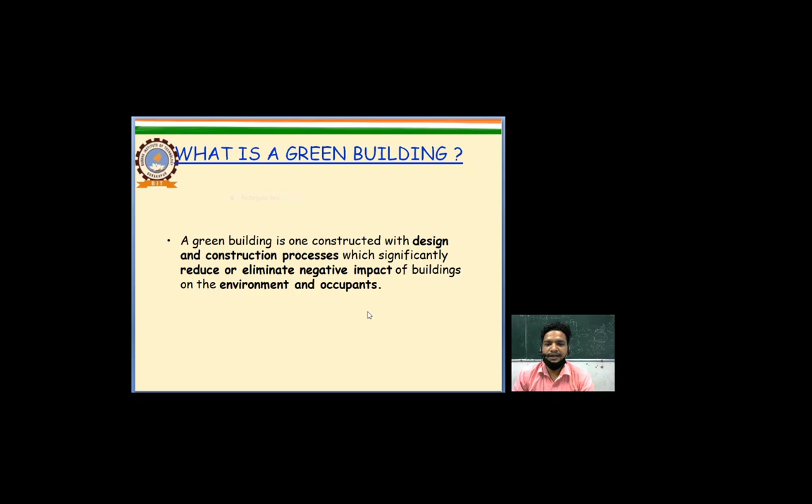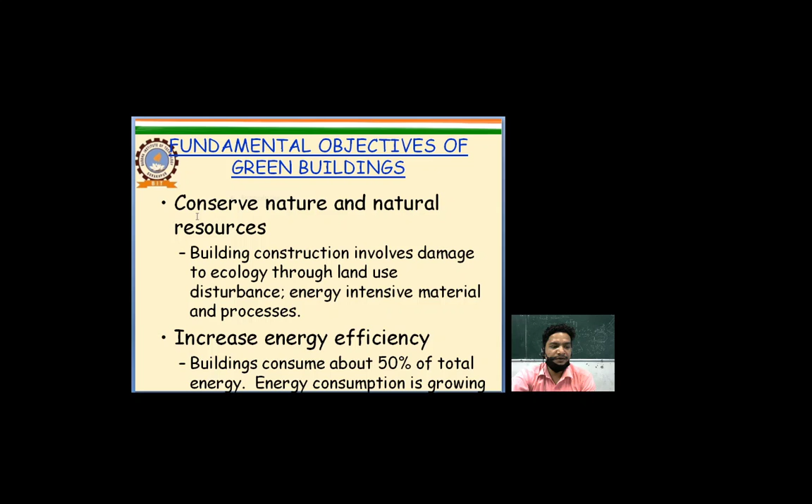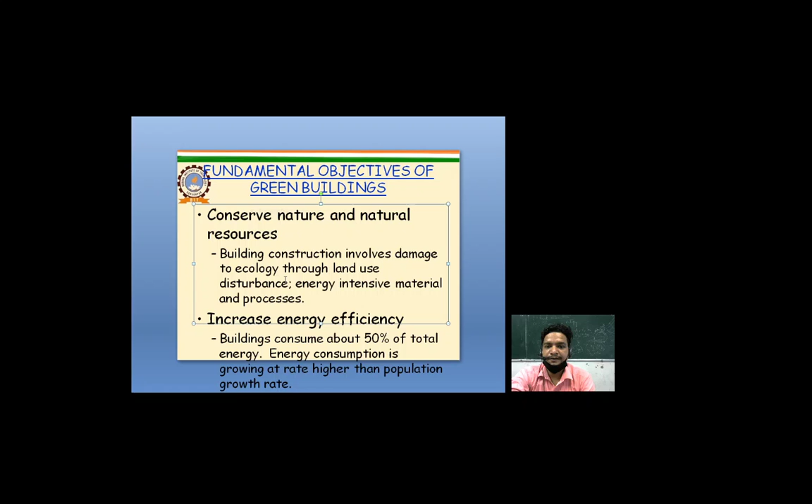The fundamental objective of green buildings: what is the main fundamental objective of green building? The main fundamental objective of green building is to conserve nature and natural resources.

If we talk about conservation of nature and natural resources, definitely fundamentals would come into existence for making green buildings. And if the building construction involves damage to ecology through land use, disturbance, energy intensive materials and processes, this must be addressed.

The second fundamental objective of green building is to increase energy efficiency, because buildings consume about 50% of total energy. Energy consumption is growing at a rate higher than the population growth rate.

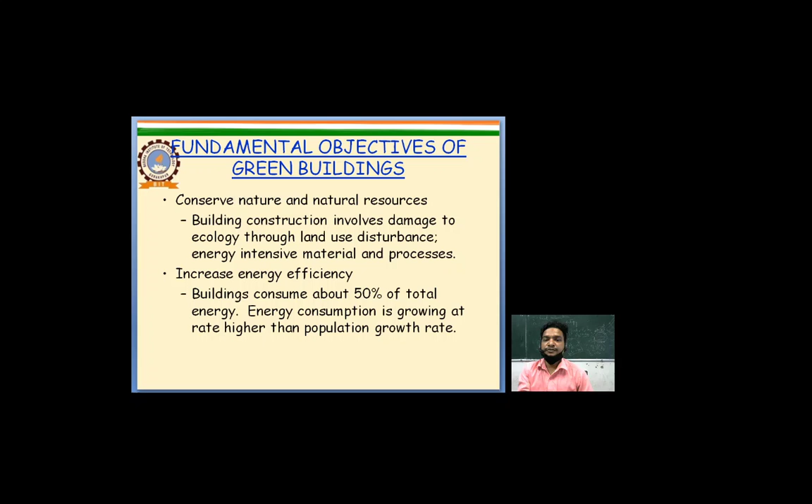If we talk about increment of energy efficiency, that would definitely be a fundamental objective of green buildings. Another fundamental objective of green buildings is to improve indoor air quality.

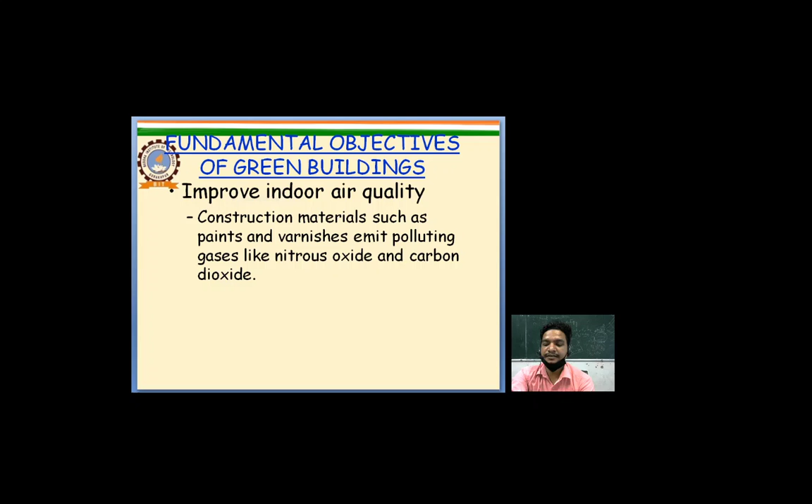If we construct a green building, the materials used, such as paints and varnishes, should not emit polluting gases like nitrous oxide and carbon dioxide.

If we look at the benefits of green buildings: the main benefit is to reduce destruction to ecology. Second is efficient use of resources during construction. Third is reduced construction waste. Next is reduced energy consumption, extensive use of renewable energy, efficient water management, and better indoor air quality through use of non-toxic materials.

If we talk about reduction of destruction of ecology, we get this benefit through green buildings. It also means more efficient use of resources during construction, because these resources are available in nature but we are not using them, and they are very eco-friendly. So it would be very efficient use of resources during construction.

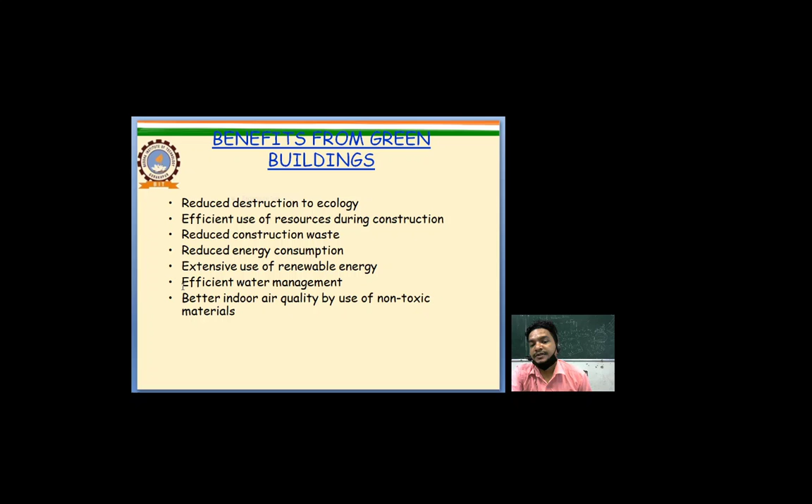Now regarding reduction of construction waste, reduced energy consumption, extensive use of renewable energy, and efficient water management - these benefits would arise with the help of green buildings, fulfilling the concept of efficient water management.

Now, regarding the economics of green buildings: over a 40-year life cycle of a building, the energy cost exceeds construction cost. A green building may cost 10 to 40% more, but the energy cost would go down by 30 to 65%. This range is the maximum in comparison to the green building cost.

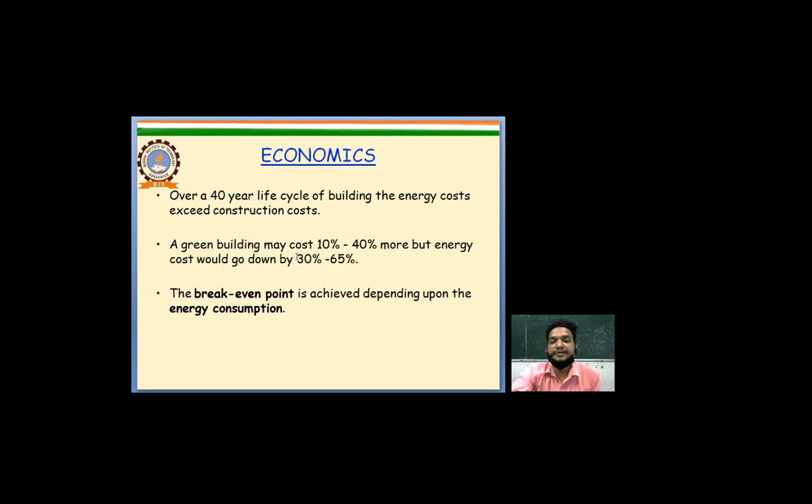The break-even point is achieved depending on energy consumption. If we want to know about strategies for building green buildings, there may be the following types of strategies.

First is to optimize use of nature for lighting and space conditioning. Second is energy efficient light fittings. Another is intelligent features to reduce energy wastage - this is the strategy in which we reduce energy wastage.

The fourth strategy for building green buildings is to use renewable energy resources - those energy resources which can be renewed again and again to fulfill our demands. The next one is bioclimatic architectural principles, a perfect strategy to build a green building.

Reducing material use in construction is also a strategy to establish green buildings, because we gain benefits - if we reduce material use, cost will be reduced and unnecessary costs would not be imposed. The next point is recycling of construction waste.

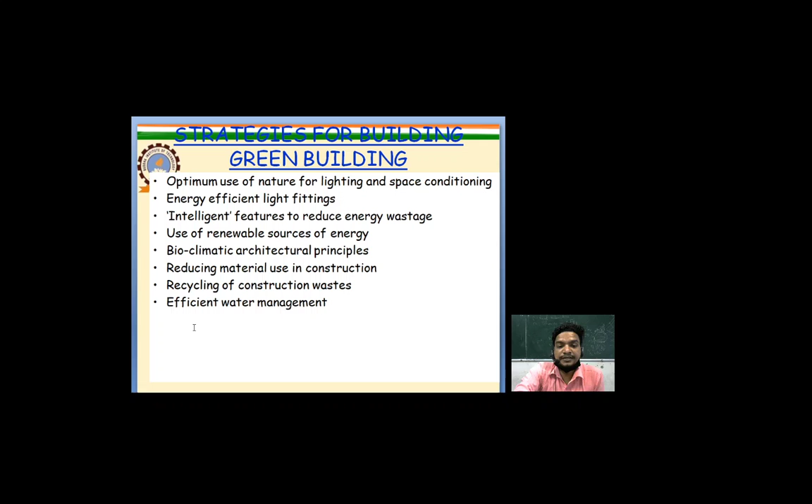Water should not be wasted. If water is wasted, then the strategy for building green buildings would not be achieved. So we will always talk about efficient water management to establish a green building.

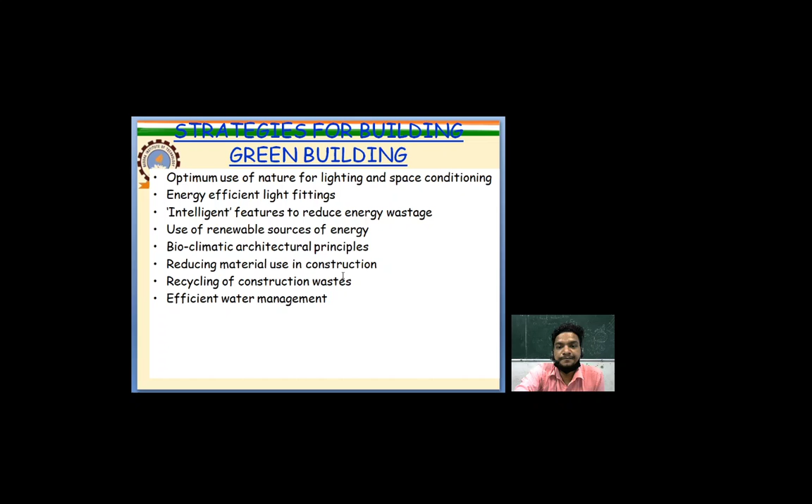Right now we have various types of problems in our life. If we talk about energy resources, there are many types - either we use conventional energy resources or non-conventional energy resources. We are very much aware of how the differentiation of renewable and non-renewable energy resources takes place.

If we talk about non-renewable energy resources, this type of energy is conventional energy resource, and it is in very limited stock, so we cannot use it for a long time. So nowadays we are talking about renewable energy resources - this type of energy can be renewed again and again, and our demand can be fulfilled for a long time.

If we talk about solar energy, solar energy is an energy resource which gives us green energy. Green energy is a renewable energy, as well as a type of energy resource which cannot give any negative impact on the environment.

Right now we have a current slide, and that is denoted to the bioclimatic architectural principles. In this slide we will talk about the bioclimatic architectural principles. This would be subjected to establishing green buildings.

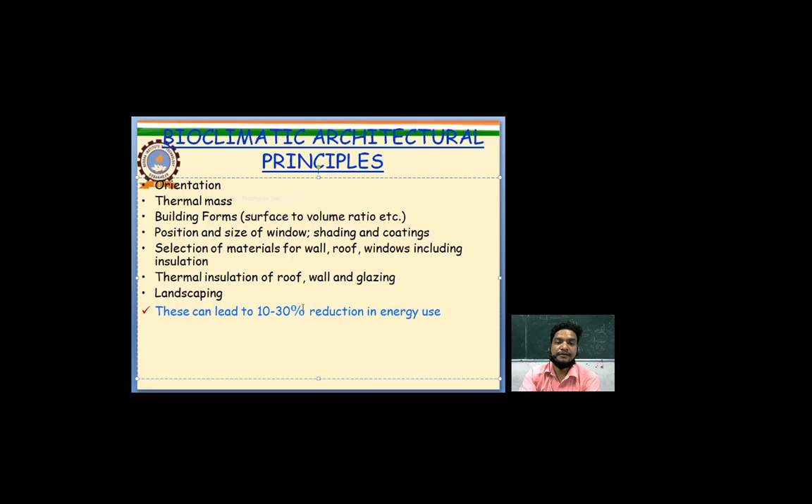If we talk about a solar water heater, with the help of solar energy we can heat the water, and the whole system is known as solar water heater. If we talk about solar power, the power is emitted with the help of the sun, and the solar radiation gives us solar energy.

And if the solar energy falls on the semiconductor, then that possesses some free electrons, and due to the motion of free electrons, electricity is conducted.

Here we can see in this slide solar passive features. If we talk about solar passive features, we will talk about the direct use of solar energy. Here in this slide there are the following types of solar passive features.

First is the earth tunnel. Next is the solar chimney. Then wind tower, cavity wall, courtyard effect, landscaping. These are the solar passive features.

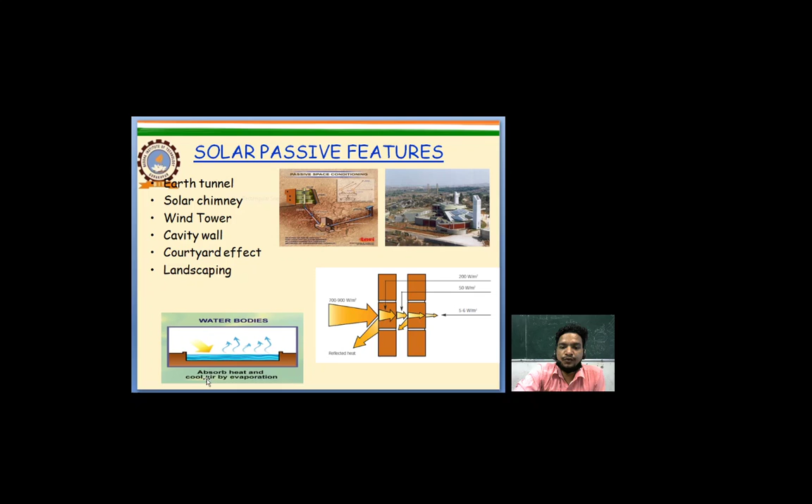In this diagram, you can see over here the absorbed heat and cooled air by the evaporation in the water bodies.

Now if we talk about the rating system, we have the following types. First is BREEAM. BREEAM's full form is Building Research Establishment's Environmental Assessment Method, and it was developed in the United Kingdom in 1990.

Next is LEED, and LEED's full form is Leadership in Energy and Environmental Design, and it was developed and piloted in the US in 1998. LEED India was developed in 2006.

The next rating system is CASBEE. CASBEE's full form is Comprehensive Assessment System for Building Environmental Efficiency. It came into existence in 2001, and it was developed by Japan.

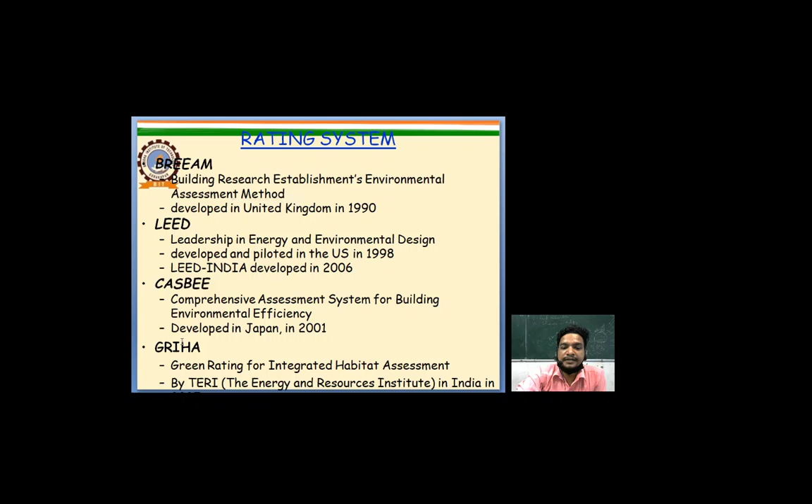Now we will talk about the rating system, and the first rating system is LEED. LEED's full form is Leadership in Energy and Environmental Design. In LEED, there are 5 key areas and 69 points.

Firstly, we will talk about the first key area, that is sustainable site development. It means in the case of LEED, we will talk about sustainable site development. After that, we will talk about water savings - the rating system LEED has the key area of water savings.

And the next ones are energy efficiency, then material selection, then indoor environmental quality. It is rated at certified levels up to platinum level.

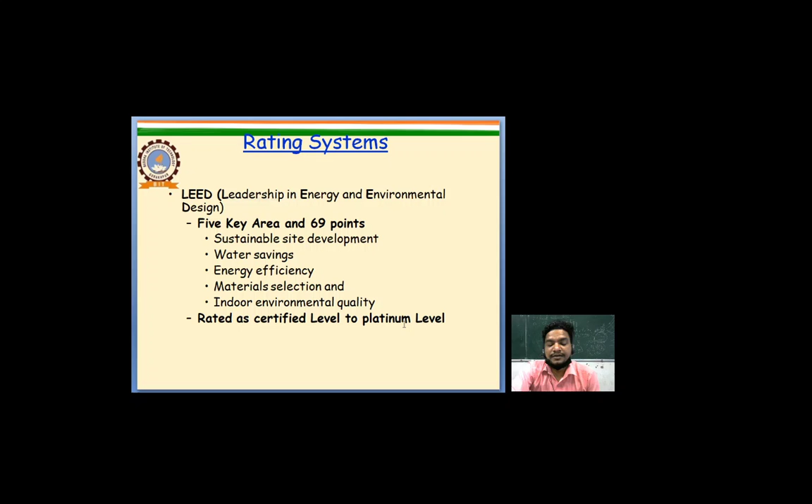You can see over here the LEED rating system. The LEED rating system has this table with three columns. First column is related to the ratings, next column is related to the number of points with a maximum of 69, and then the third column is related to the number of points in 2011, which goes up to 110.

For LEED certified, this range falls between 26 to 32, and in 2011 this value goes to 40 to 49. LEED certified silver level, gold level, platinum level: for silver level, the value in 2011 is 50 to 59, for gold level 60 to 79, and for platinum level it is above 80 in 2011.

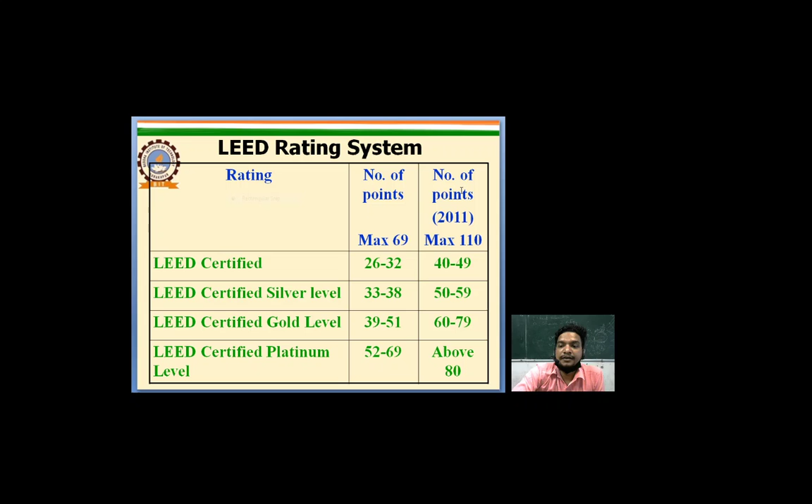Now, if we talk about the green buildings in India, under the certification of IGBC USGBC, there are 2,512 buildings registered, out of which 481 are certified. It means only 481 buildings are certified while 2,512 buildings are registered.

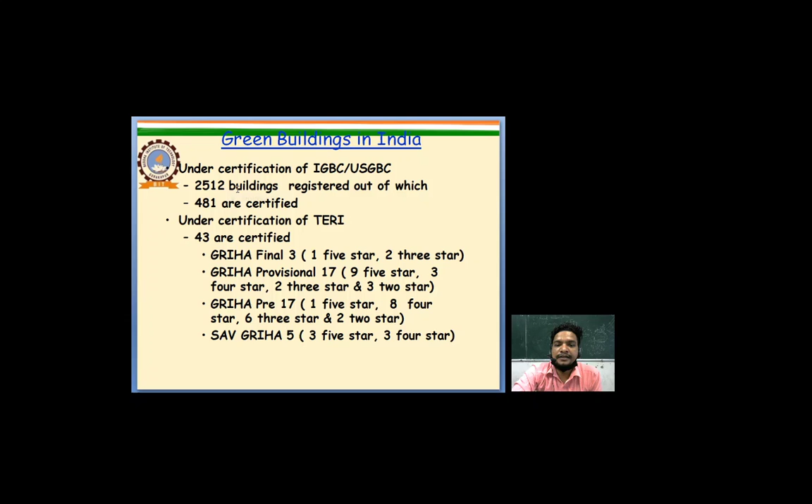Under the certification of TERI, 43 are certified, in which GRIHA final 3, 1 five-star, 2 three-star. Here, all the summary for the TERI rating system in India is given.

Now, if we talk about the benefits of green buildings, there may be the following benefits. First one is the tangible benefits. In tangible benefits, the form of benefit is a 20 to 30% reduction in energy consumption.

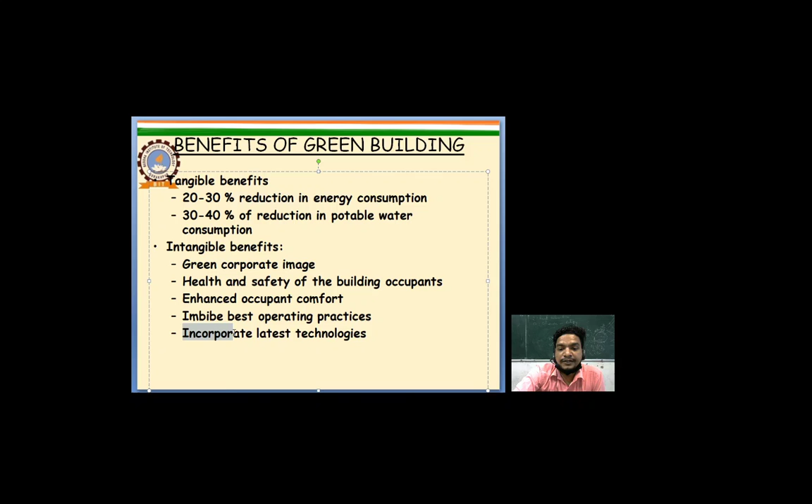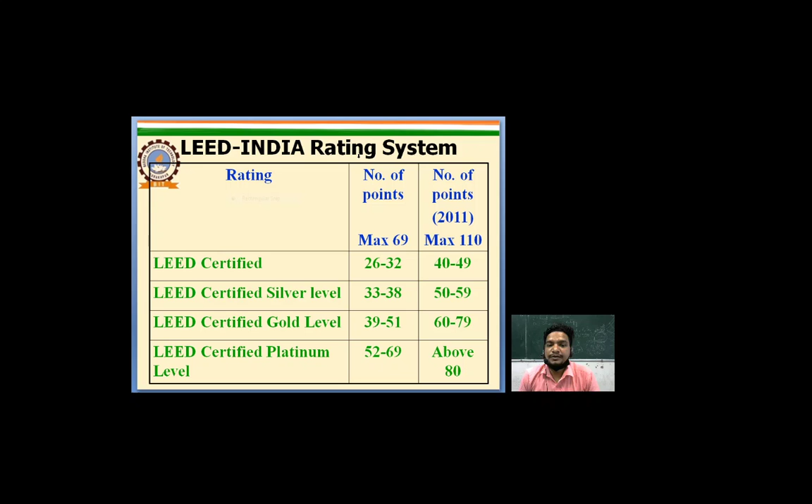Yeah, in the LEED India rating system there are three columns. First is rating, then number of points up to 69, and number of points according to 2011. I think these slides have been discussed.

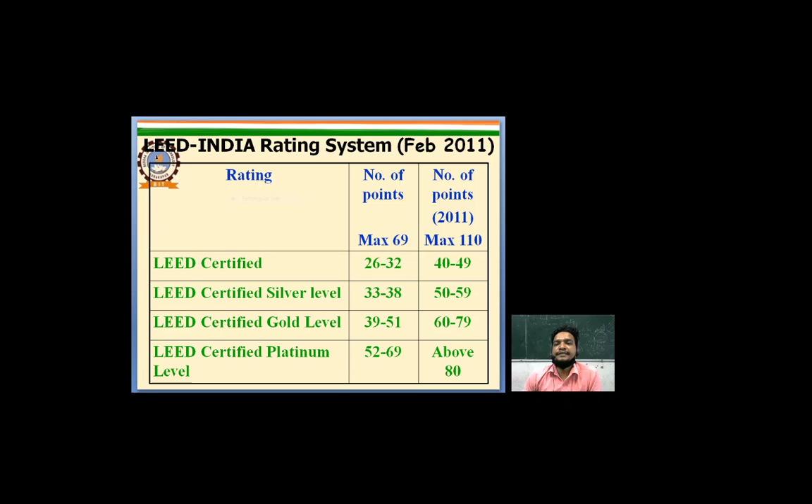Now, here the prerequisites: first one is the site selection and planning.

Site selection and planning. In site selection and planning, the requisites are related to the construction activity, pollution control, then water efficiency, water use reduction. These are the prerequisites.

Before you find the details of green buildings, you must be aware of the prerequisites. The first prerequisite is site selection and planning. The location is what would be subjected to the existence of the green building. After site selection, a plan base would be there, so we have to plan about that.

So construction activity, pollution control, definitely will be there, and water efficiency. If we talk about water efficiency and the prerequisites, then we have to reduce the water use.

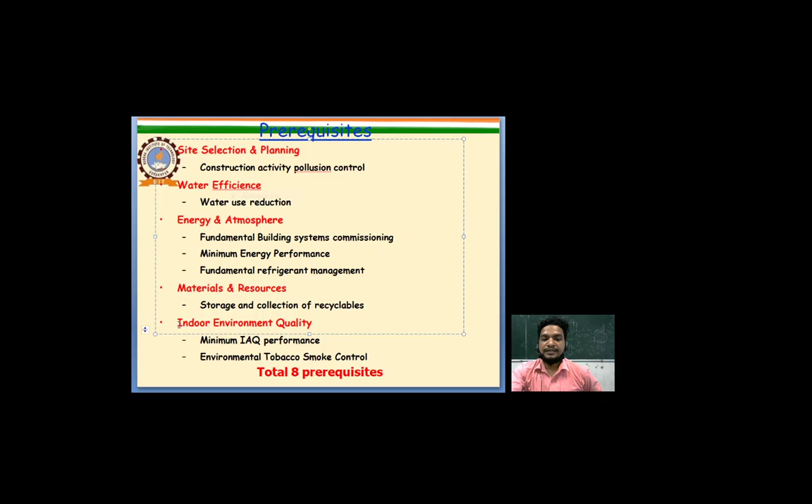Storage and collection of recyclables. We have to be aware of the type of resources which can be recycled, and take it seriously for the main purpose, that is to make green buildings. And next one is indoor environment quality.

Now, first one is sustainable site. Sustainable site is the site selection point one: high value form land, high hydrogeological risk, habitat for any species listed as threatened or endangered, high ecological value, public.

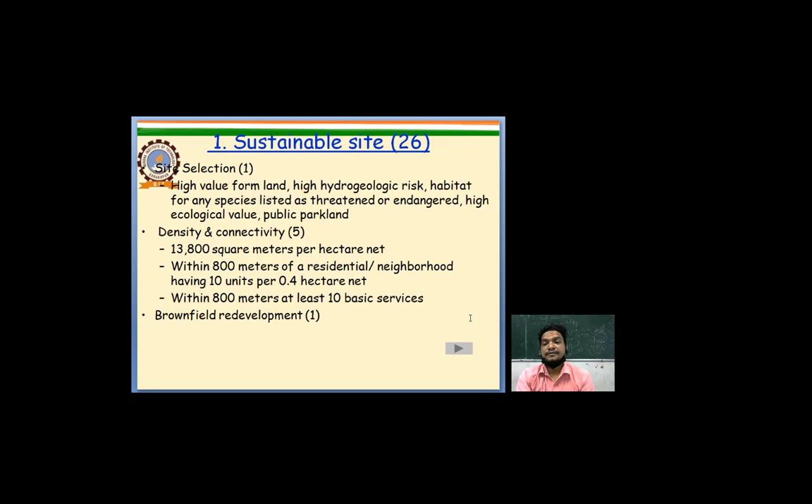Sustainable sites having some points, such as site selection, and another one is density as well as connectivity. Example of numeric values over here.

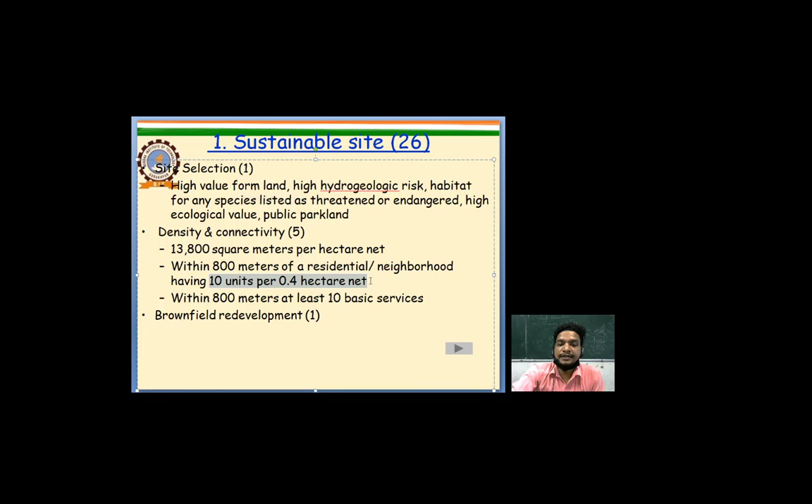13,800 square meters area is given, and this is within 800 meters of residential area, and it having 10 units per 0.4 hectare net. Within 800 meters, at least 10 basic services.

Now, for sustainable site, alternative transportation is 12 points: public transportation access is 6, bicycle storage and changing rooms is 1, low emitting and fuel efficient vehicle is 3, and preferred parking capacity is 2.

Site development has a numerical value of 2. What is the main motive of site development? It is to protect or restore habitat as well as to maximize the open space.

Next one is stormwater design, having the number 2 points. First is quality control. If we talk about quality control, we will talk about the evolution of quality control. Many years ago, the stone age was there, and during that time, stone-made tools were used.

But as technologies increased, due to that increment, the tools standard got changed, and due to that change, evolution takes place. Right now we are talking about innovations, and this is above the technology.

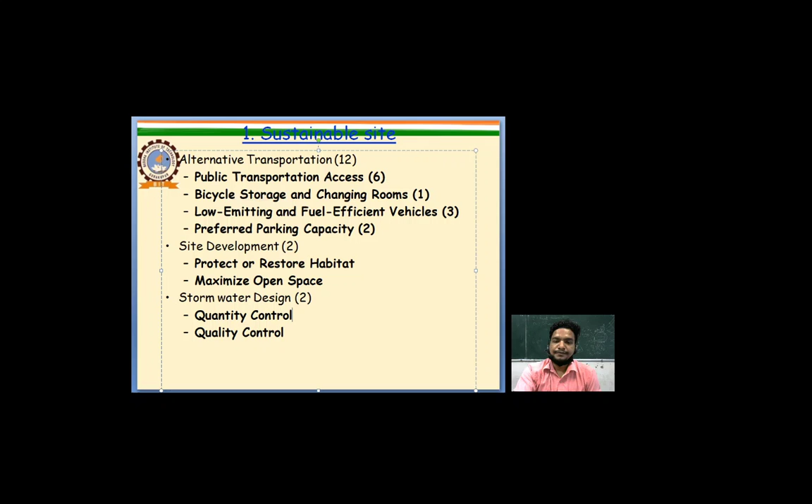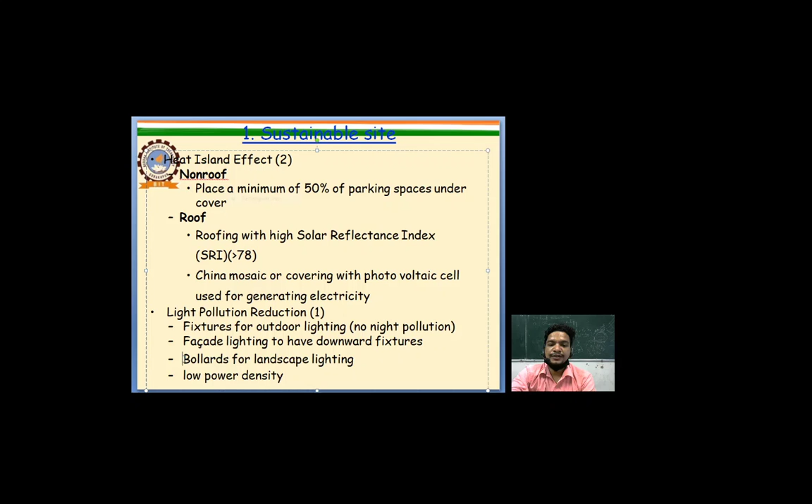Next one is light pollution reduction. This includes fixtures for outdoor lighting with no light pollution, facade lighting to have downward fixtures, bollards for landscape lighting, and low power density.

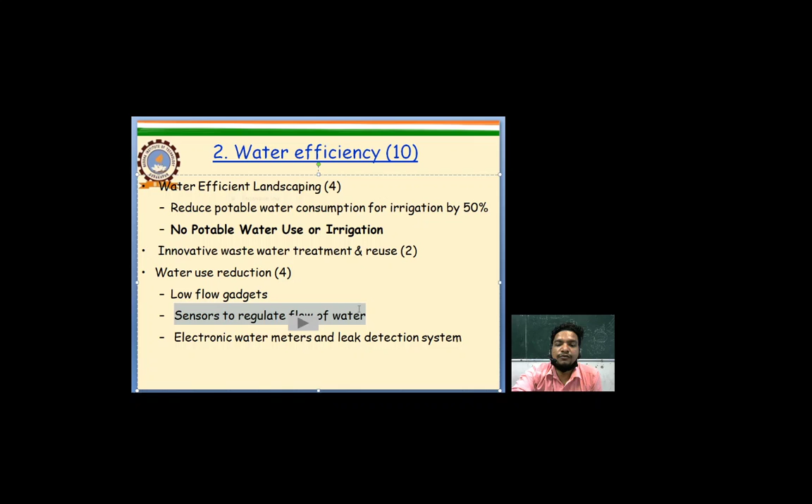Next point for water efficiency is innovative wastewater treatment and reuse. If we use innovative wastewater treatment, we can reuse that, and water will not be wasted. Water use reduction includes low flow gadgets, sensors to regulate flow of water, as well as electronic water meters or leak detection.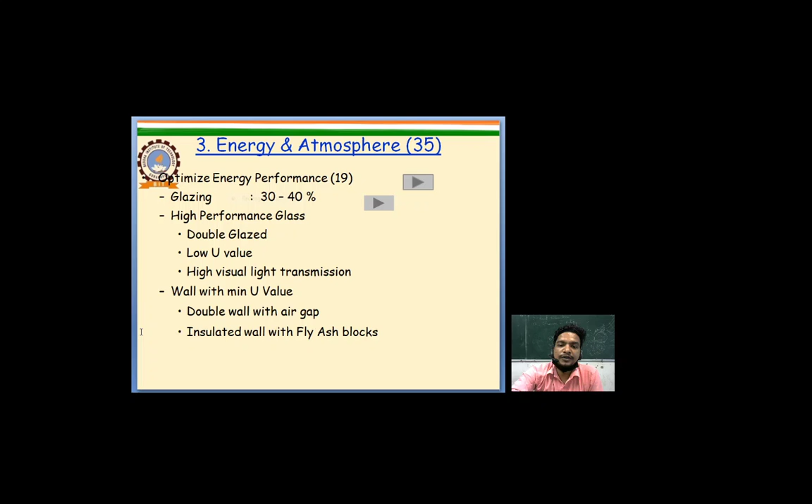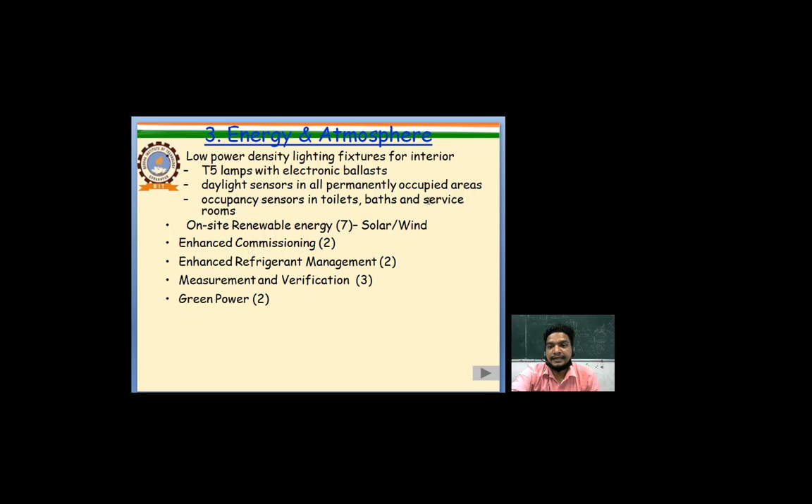Enhanced commissioning, enhanced refrigerant management, measurement, verification, green power. These points are for energy as well as atmosphere to build green buildings.

Now materials: 4 points are given for building reuse, 2 points for construction waste management, 2 points for material reuse, 2 points for recycled content like fly ash in concrete, plaster, bricks, etc. Regional materials get 2 points.

Use of carpet, etc. Use of recycled and refurbished material. Rapidly renewable products, 1 point for there. Certified wood. This should be in the form of material to build green buildings.

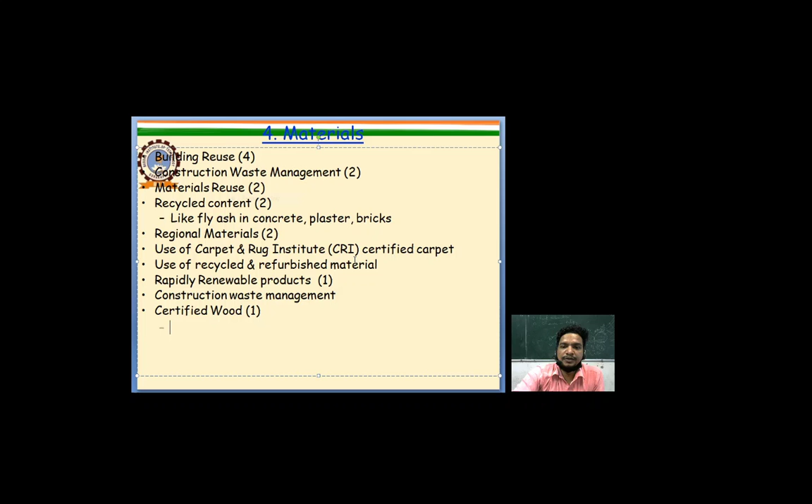Third point for the new building: outdoor air 30% more than ASHRAE, American society, and separate room for heavy duty copying machine chemical mixture. Flush out building before occupancy, and carbon dioxide monitoring system should be there.

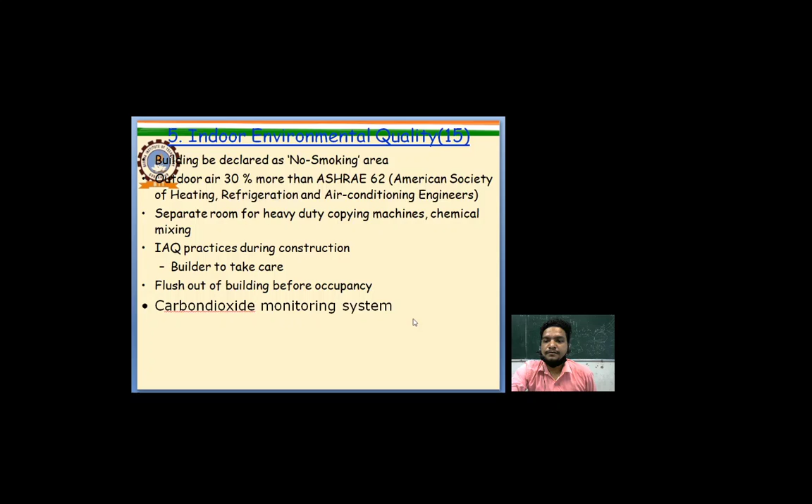Now the next is indoor environmental quality. First one is the controllability of system. If we will talk about indoor environmental quality again, then we will talk about the controllability of system.

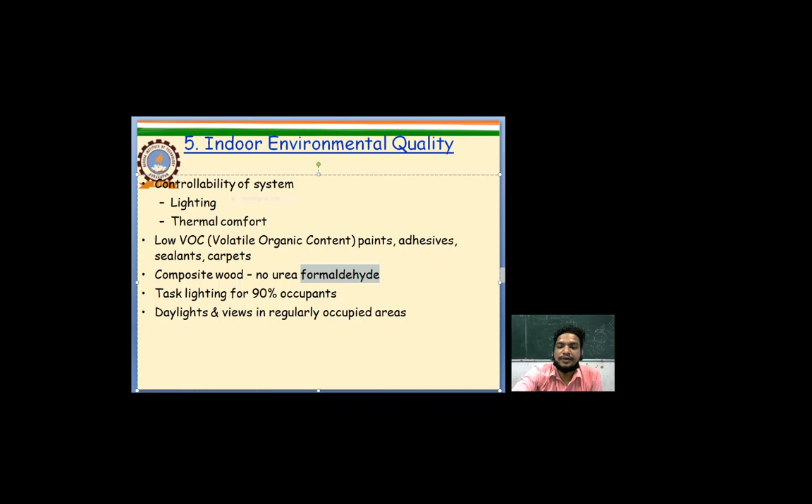Now the next one is innovation and design. Exemplary water efficiency, reduction in potable water use - you have to increase this reduction more than 40%. That is innovation and design.

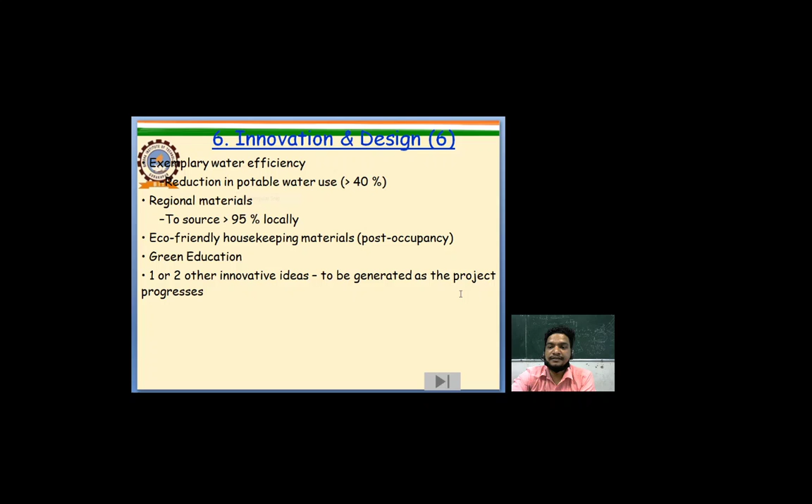Regional materials to source should be greater than 95% locally, and it should be eco-friendly housekeeping materials post occupancy. Should be green education, one or two other innovative ideas to be generated as the project progresses.

Regional priority: first one is water efficient landscaping, then innovative wastewater treatment and reuse, then water use reduction, then optimize energy performance, after that enhanced commissioning, and after enhanced commissioning, measurement and verification. These are the regional priorities.

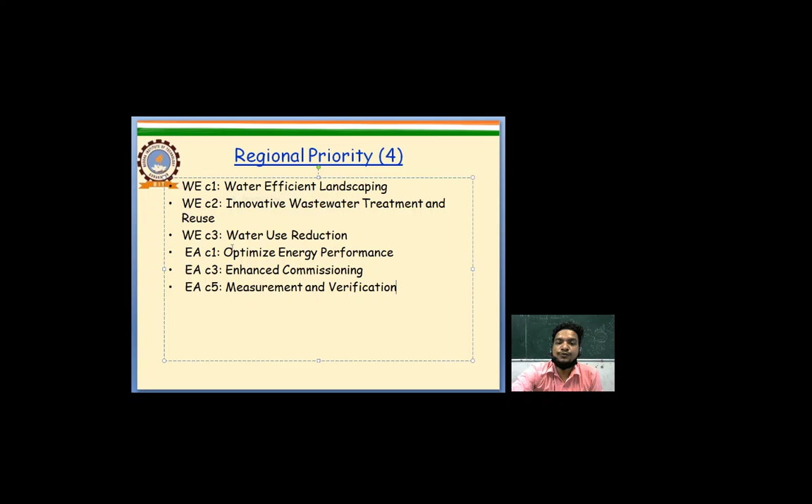First one is water efficient landscaping, then innovative wastewater treatment and reuse, water use reduction. These are the regional priorities.

Now we will talk about the approach for green buildings. Firstly, there should be teamwork. Without teamwork, nothing is possible. So for green buildings, there should be teamwork. And the teamwork would be among which persons? Would be the contractors, would be the consultants, and after combining their effort, a teamwork would come into existence.

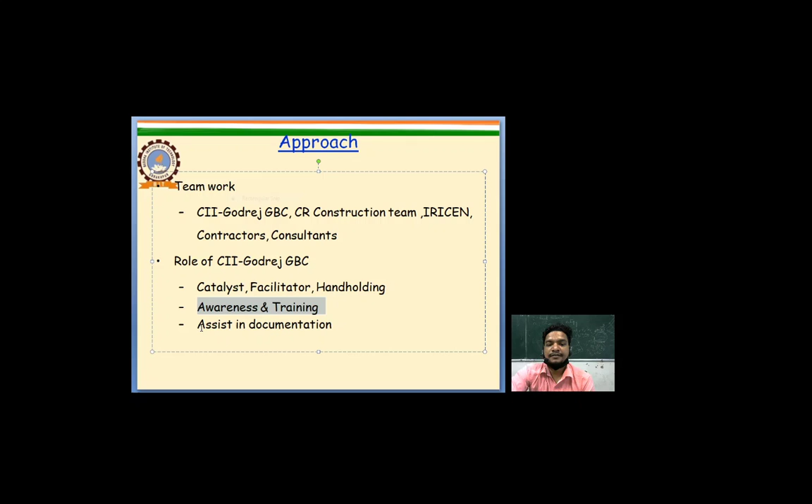Next one is the role of CII Godrej GBC. It is the catalyst, facilitator, hand-holding, awareness and training, assist in documentation. What next?

Register project with IGBC, Indian Green Building Council. Appoint consultant for facilitation, energy simulation, as well as fundamental commissioning agent.

Energy simulation is very important. Then implementation of improvements, then documentation by consultant architects team CII, then this will be reviewed by IGBC, then LEED India certification would be there. So these steps are those steps which will come before the LEED India certification.

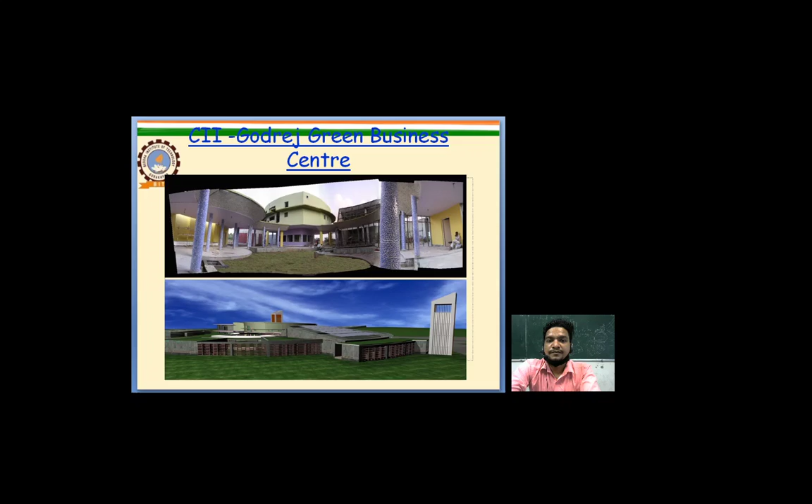90% of the building has adequate natural lights. So that's why 90% of building has adequate natural lights.

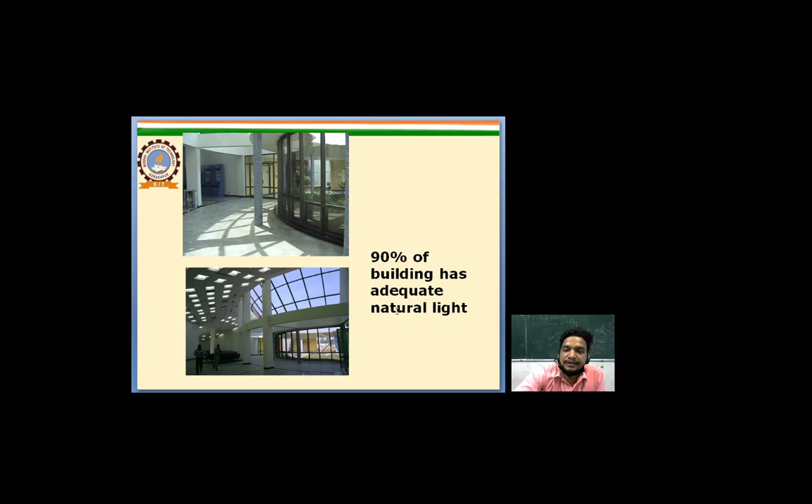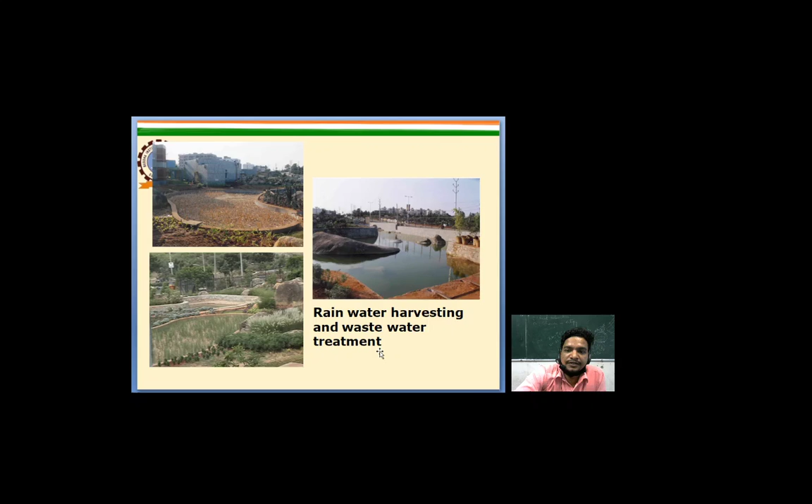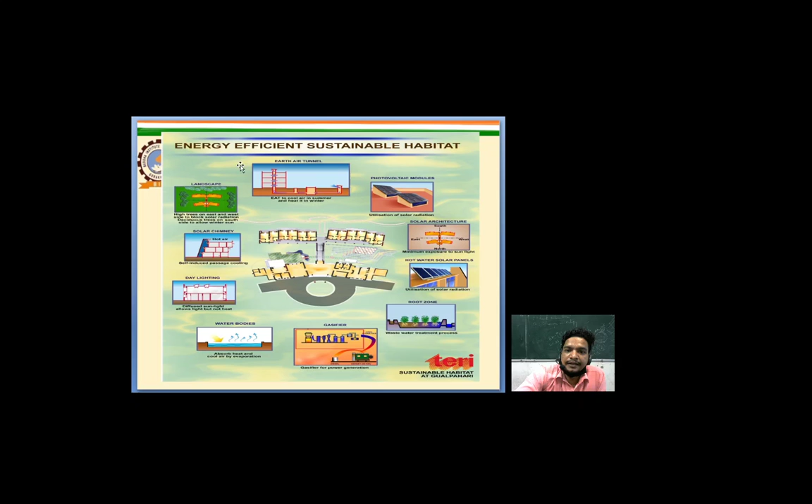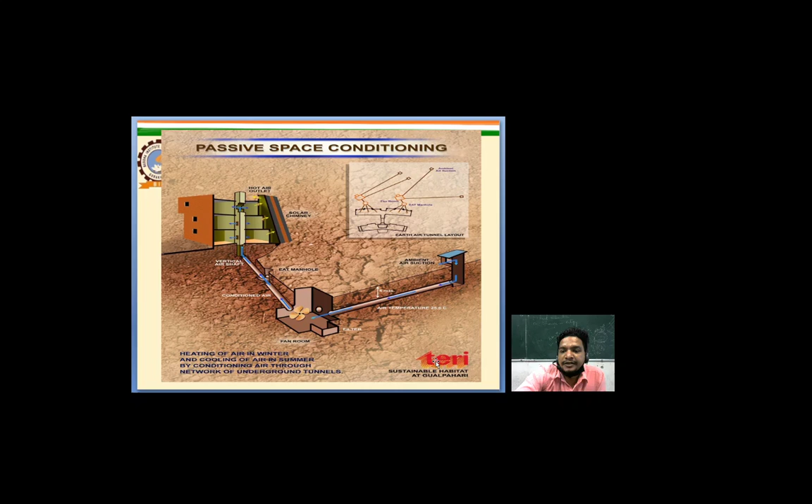TERI retreat is over here. This is the energy efficient sustainable habitat over here. Passive space conditioning is over here, and that comes under the category TERI sustainable habitat.

This whole diagram is related to renewable energy. And in the renewable energy, we will talk about the photovoltaic gasifier hybrid electricity. In this diagram you can see this is a diesel genset generator. It produces electricity, it goes to the panel room to supply electricity, and from the solar panel the electricity produced is stored in the batteries, and here the process takes place.

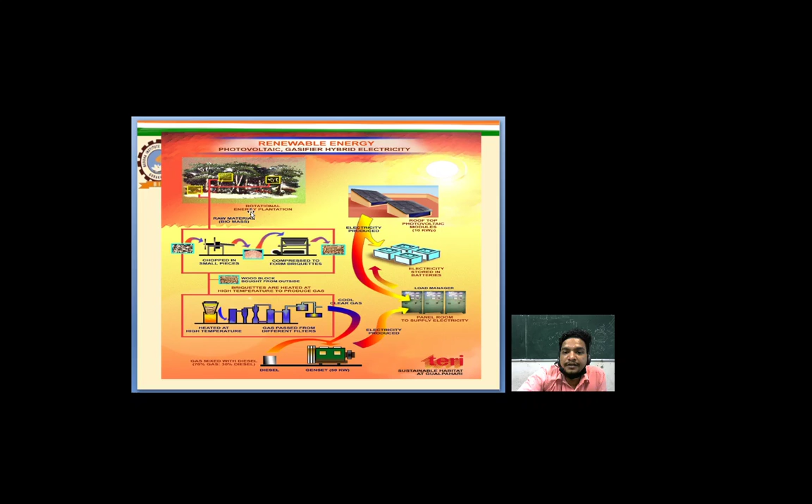And rotational energy plantation is over here, and this is the water and waste management system.

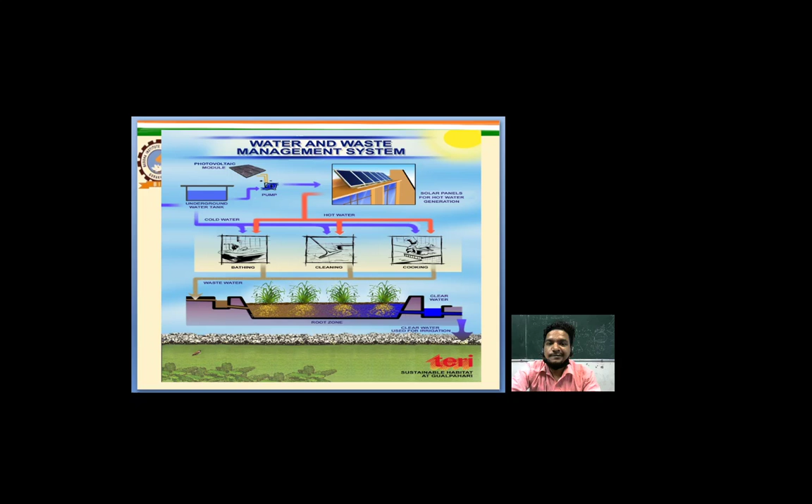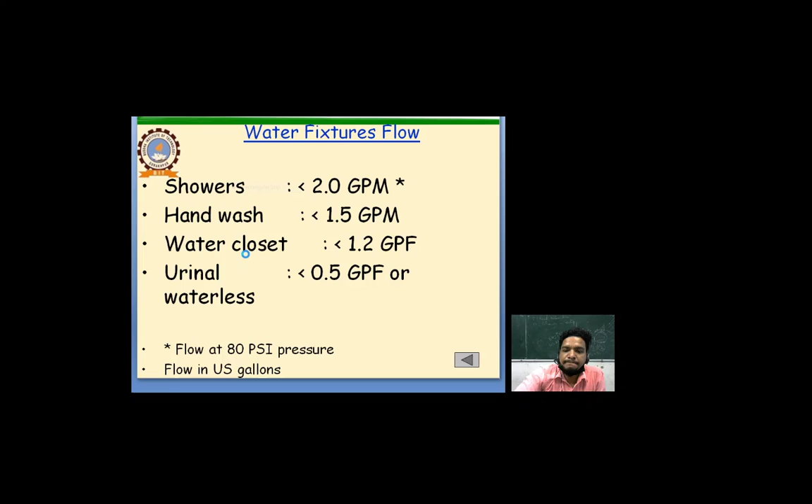I think all things should be clear to you, and the rest of the session we will discuss in the next lectures.